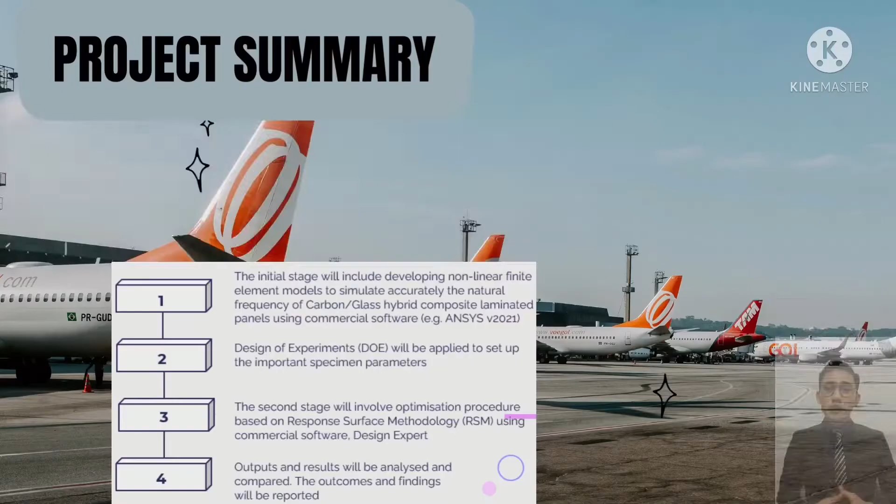final year project 1. The title for my FYP will be Natural Frequencies Optimization of Hybrid Composite Laminates by using Response Surface Method. For the project summary, this project will determine and optimize the natural frequency of hybrid composite laminates using numerical approach.

The initial stage will include developing a non-linear finite element model to accurately simulate the natural frequency of carbon glass hybrid composite laminated panels by using ANSYS. Design of Experiment (DOE) will also be applied to set up the important specimen parameters.

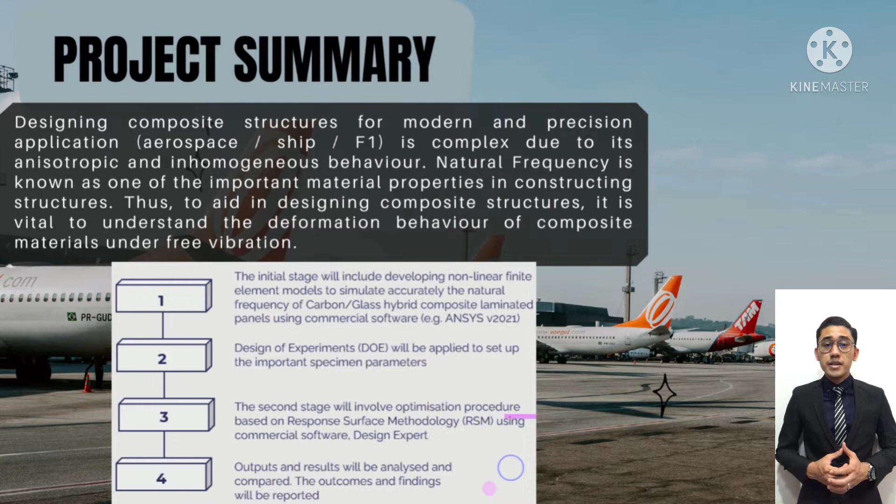The second stage will involve an optimization procedure based on RSM, which is Response Surface Methodology. By using Design Expert, output and results will be analyzed and compared. The outcome and findings will be reported.

For the introduction, due to the superior strength to weight ratio, fatigue resistance, and longer durability as compared to metal, hybrid composite materials are widely used in aerospace, marine, and automotive industry. Thus, before developing a specific application, it is critical to understand the mechanical properties and limitations of composite laminates.

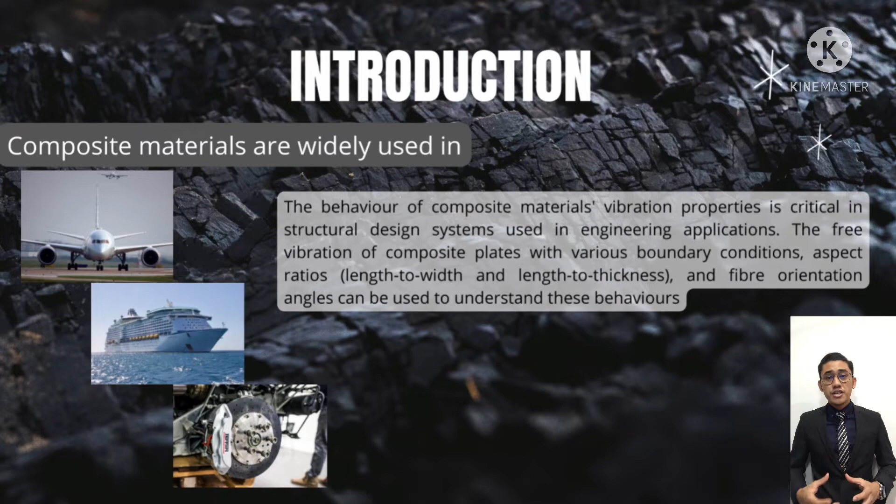The behavior of composite material vibration properties is critical in structural design systems used in engineering applications. Among the primary parameters which have a significant impact on a structure's serviceability are its natural frequencies and mode shapes. When an external vibration coincides with one of the natural frequencies of a laminated composite, a resonant phenomenon develops, resulting in catastrophic failure of the structure.

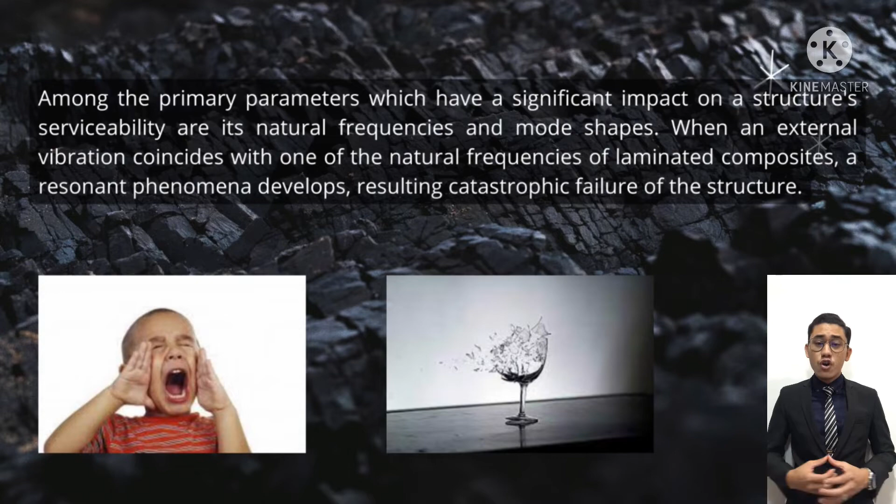So now I will be talking about literature review. But before that, we must know what a literature review is all about. A literature review is one of the research methods used to examine previous studies with the goals of generating ideas, developing project concepts and procedures, and so on.

This technique offers the opportunity to learn the theoretical background of the current study and to better understand it. Apart from that, it assists in identifying gaps in past research and demonstrates how the current study might fill them.

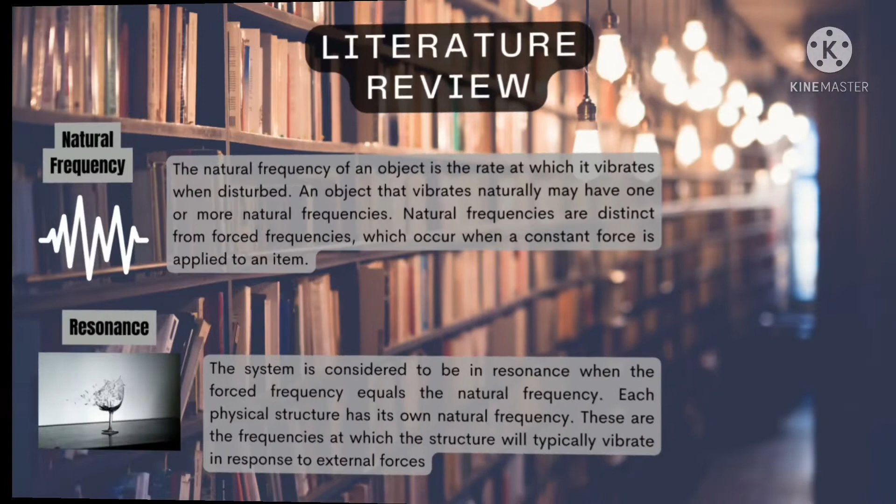So as you can see, there is a natural frequency and a resonance. So what is that? The natural frequency of an object is the rate at which it vibrates when disturbed. An object that vibrates naturally may have one or more natural frequencies. Natural frequencies are distinct from force frequencies, which occur when a constant force is applied to an item. The system is considered to be in resonance when the force frequency equals the natural frequency.

Each physical structure has its own natural frequency. These are the frequencies at which the structure will typically vibrate in response to external forces. These frequencies are dependent on the way mass and stiffness are distributed within the structure.

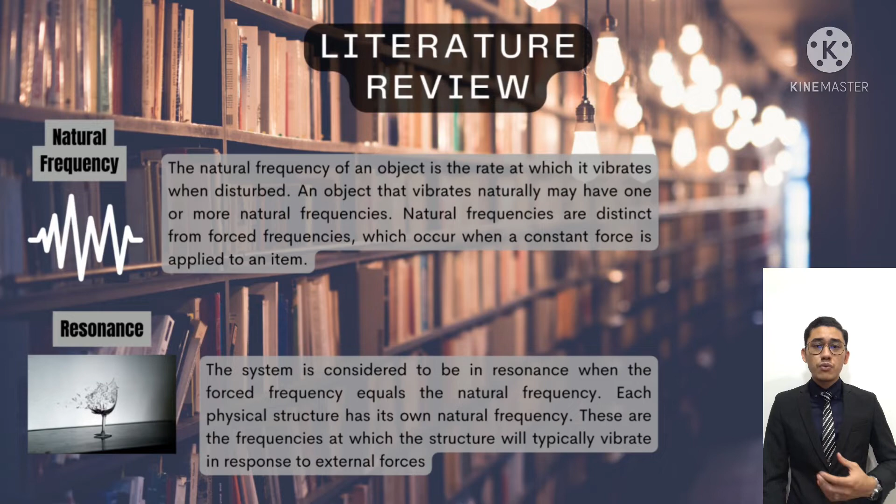As you can see, there are a few examples of previous studies on hybrid laminated composite material, such as Nayak conducting physical testing and numerical simulation of woven fiberglass epoxy laminate composite plate free vibration. Norman and team used ANSYS software and analytical techniques to study free vibration of laminate composite beams caused by the effect of lamination scheme, based on previous study by Khayal and team.

Shi did establish an analytical approach for free vibration analysis. So according to the literature, it can be concluded that when designing hybrid laminated composite under dynamic loading conditions, natural frequency is an important property to be measured. Therefore, it is crucial to investigate the dynamic characteristics of carbon glass hybrid laminated composite plate.

The main focus of this study is to investigate the effect of various lamination schemes, ply thickness, and hybrid volume fraction on the natural frequency of carbon glass hybrid laminated composite plate under free vibration.

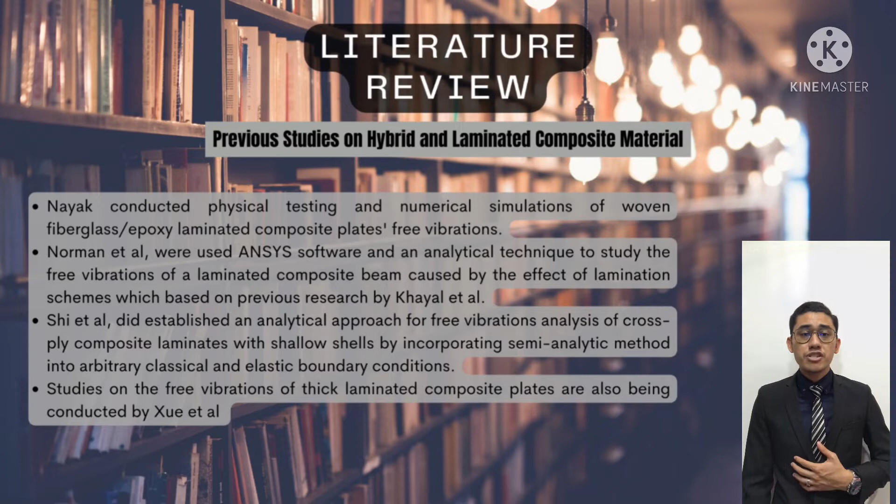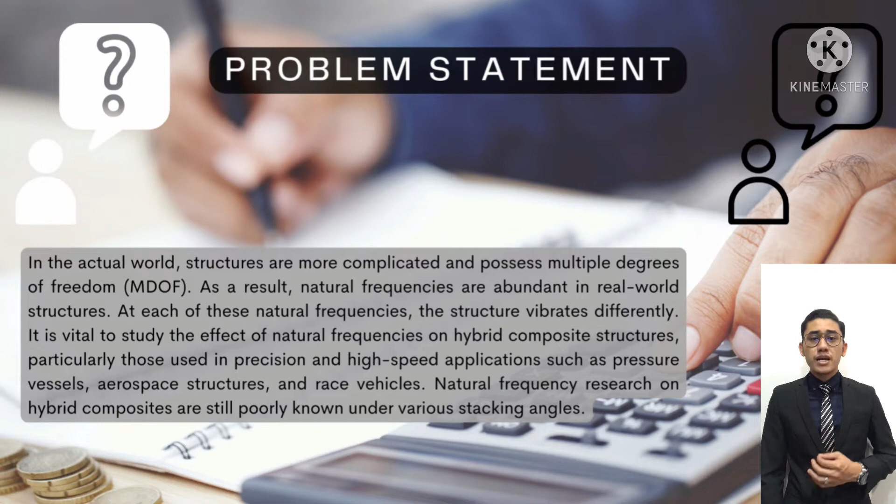For the problem statement, we know that natural frequencies are abundant in real-world structures. At each of these natural frequencies, the structure vibrates differently. It is vital to study the effect of natural frequency on hybrid composite structures, particularly those used in precision and high-speed applications such as pressure vessels, aerospace structures, and race vehicles. Natural frequency research on hybrid composites is still poorly understood under various stacking angles.

There are three main objectives of this study. The first is to develop an accurate finite element model of composite laminate using ANSYS. Second, to analyze the effect of lamination scheme, plate thickness, and hybridization towards the natural frequency and mode shape. The third is to determine the optimum parameters using response surface methodology (RSM) and design of experiment (DOE).

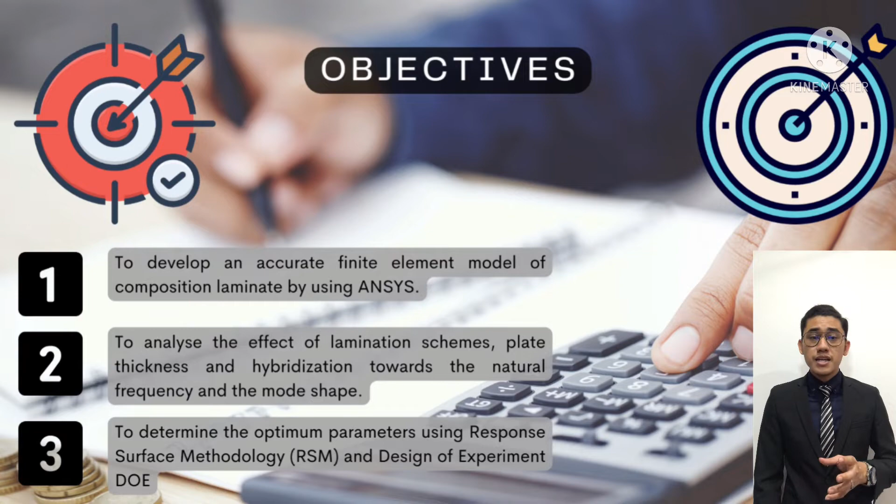There are 6 scopes and limitations of this project. The first is that the hybrid composite laminate used in this study is carbon epoxy and glass epoxy. The second is that the laminate consists of 4 layers with lay-up of symmetry and anti-symmetry.

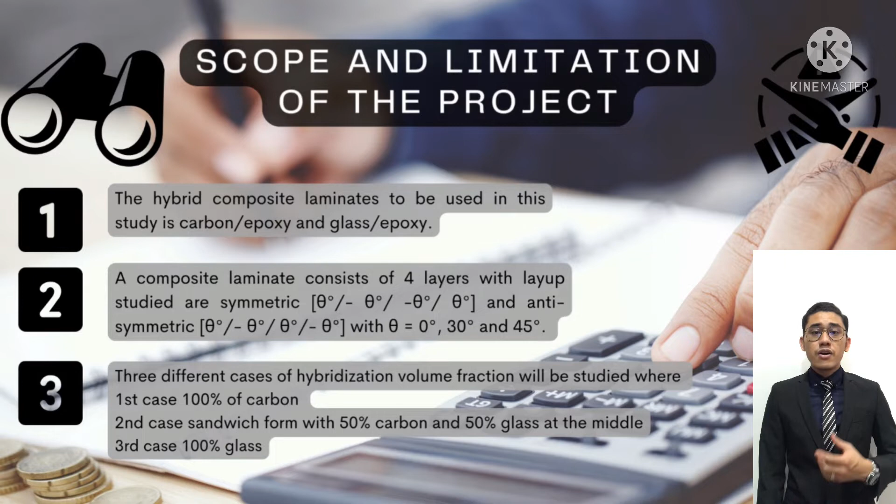The third is different cases of hybridization volume fraction: the first case is 100% carbon, second case is 50% carbon and 50% glass, and third case is 100% glass. The fourth is plate thickness, which will be 2mm, 1mm, 0.5mm, 0.2mm, and 0.1mm.

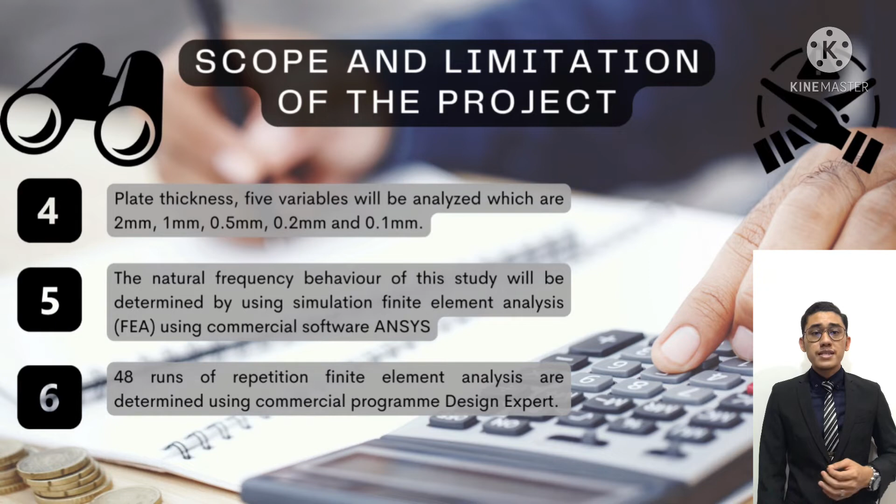Next, the natural frequency behavior of the study will be determined by using FEA. Last but not least, 48 runs of repetition finite element analysis are determined using design expert.

Here is the methodology. There will be 4 stages. Stage 1 is the convergence analysis and numerical validation. Stage 2 is setting up case study using DOE, design of experiment. Stage 3 is free vibration analysis. Stage 4 is optimization using RSM, response surface method.

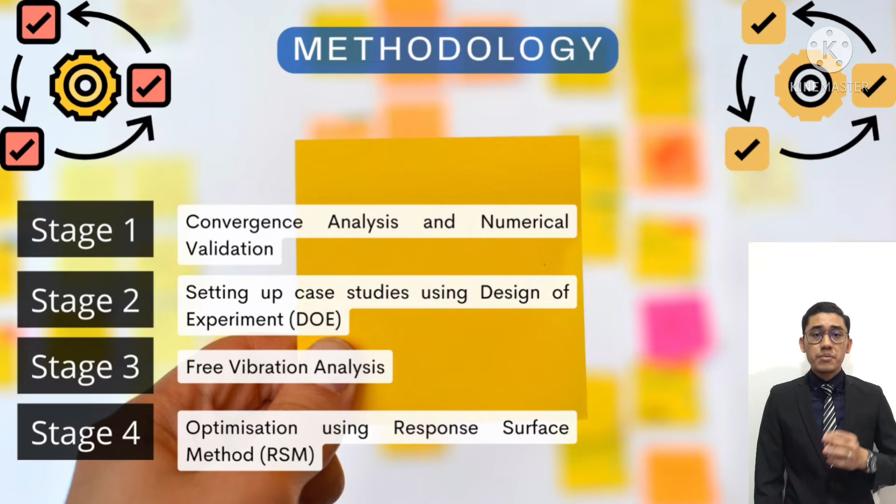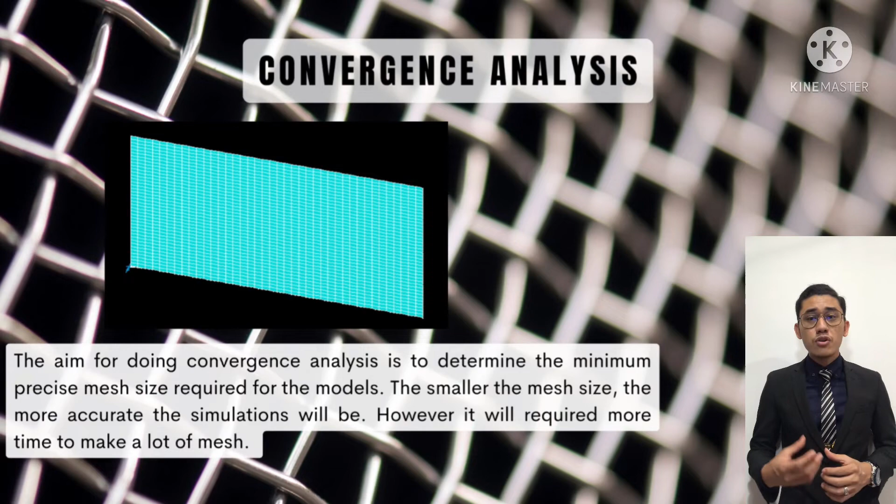Why do we need to do the convergence analysis? The aim of doing the convergence analysis is to determine the minimum precise mesh size required for the models. The smaller the mesh size, the more accurate the simulation will be. However, it will require more time to make a lot of mesh and perform the analysis.

The figure above proves that mesh size affects the result of the simulation by only a minor percentage. Figure 1 shows that when the mesh size is 60 x 60 onward, the result will constantly be the same. Figure 2 shows that when the mesh size is 30 x 30 onward, the result will be the same.

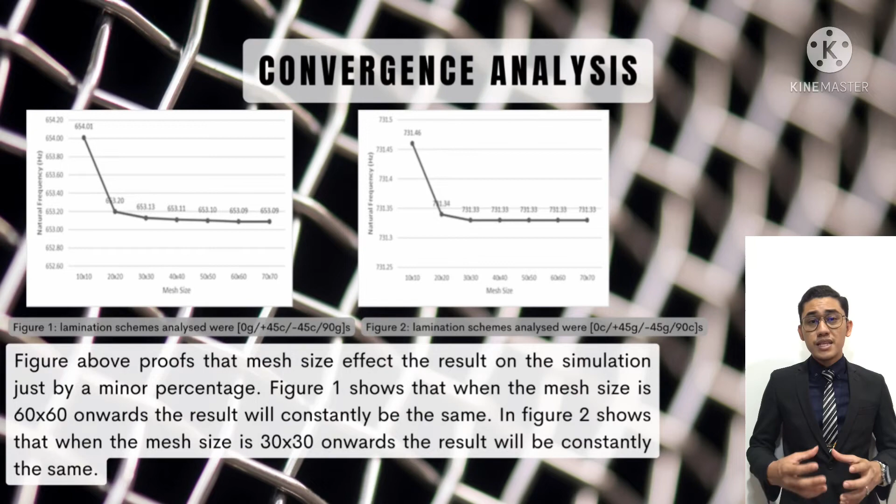The numerical validation is to validate the finite element simulation procedure for performing the free vibration analysis of a hybrid laminate composite plate. The current simulated results are compared to the results from available past literature.

As you can see from the table above, the differences and errors are calculated. It shows that for the first lamination, the maximum error is 1.17%, and for the second lamination, the maximum error is 11.73%. The difference may be due to the material properties that were given.

By doing this numerical validation, we can determine whether the method used to calculate the result is correct or not. So for this case study, it shows that the method is correct.

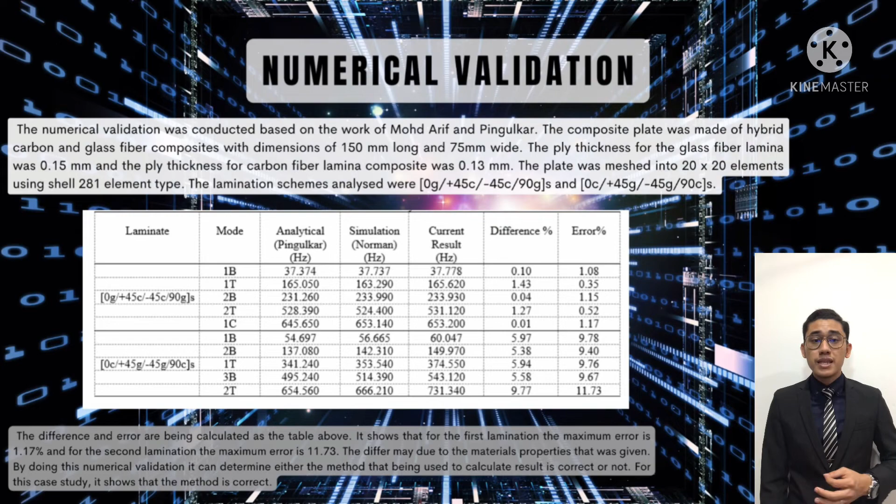Next will be setting up the case study using DOE, Design of Experiment. Design of Experiment is a field of applied statistics concerned with the planning, execution, analysis, and interpretation of control tests to analyze the factors influencing the value of the parameter or combination of parameters.

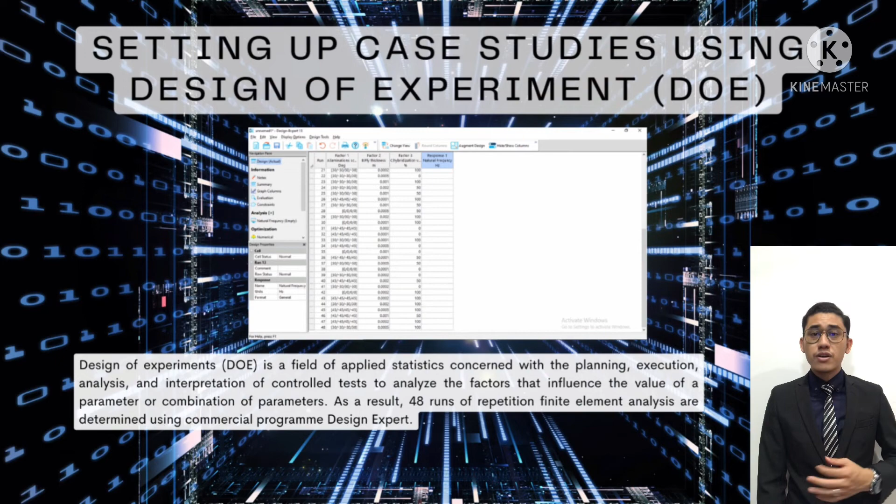As a result, 48 runs of repetition finite element analysis are determined using Design Expert for this project. The expected result for this study is that there will be an effect toward the natural frequency and mode shape of 4 layer symmetric and anti-symmetric carbon and glass hybrid composite laminate due to the variation of plate thickness and hybridization.

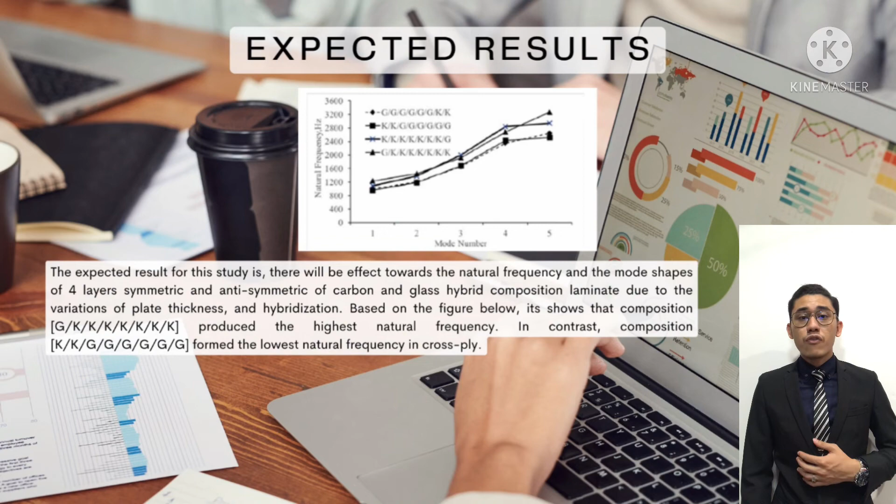Based on the figure above, it clearly proves that varying the laminate stacking sequence will affect the dynamic behavior of the composite. Even though the components have similar properties, the component stacking sequence will give a different value of natural frequencies. This variation in composition brings a greater degree of flexibility to the structural design of composite material.